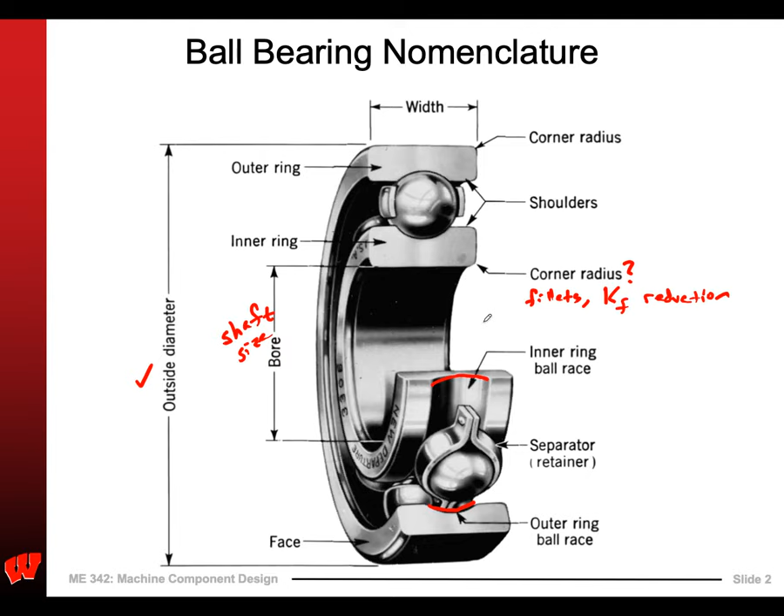So that's the basics of a basic deep groove ball bearing. As I mentioned, there's several types of ball bearings. There's the deep groove - the filling notch means it's big enough here. Typically there's only one filling notch where I offset the rings, and then I can get the ball in there. There's also the angular contact bearing, though this doesn't actually show it very well.

We'll skip that - a bunch of other ones. The shielded means there's just some sort of little clip here that prevents stuff from getting in. This is sealed, where it's shielded and has some sort of rubber seal to keep dust out. So this is good for dust, and maybe some rainwater. These are not really submergible - if we tried to submerge these, they would get wet.

Self-aligning - this is what we've talked about a lot. We say, assume it's self-aligning bearings. Because what can happen is this can tip relative to this, where it mounts on the outside, and then this whole thing can rotate in here. So this could tip this way or this way. That would not provide a resistance to moment, whereas this would. We don't want to do that because it puts undue stress on the bearing, but this can freely slip.

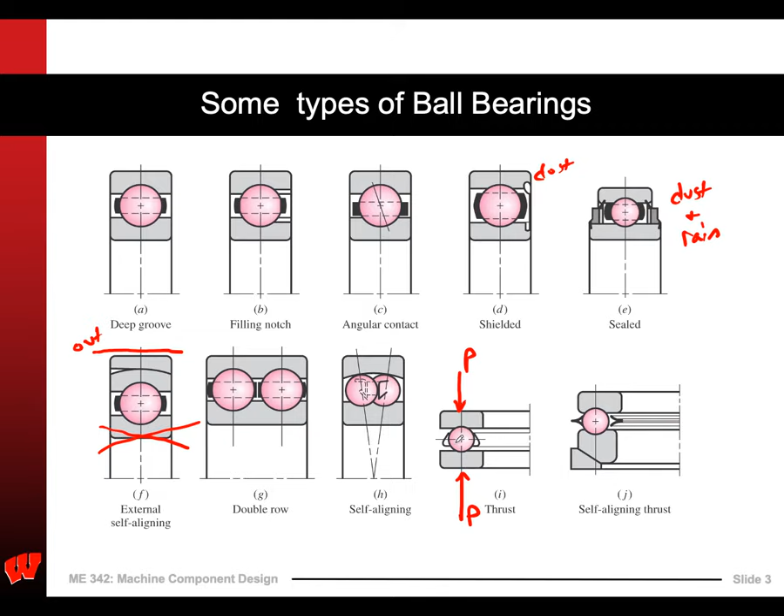Double row, self-aligning. A thrust bearing is where the load goes like this. These other ones are all made for a radial load - here's the center line, this is radial load. Here's the load that compresses the bearing that way.

Roller bearings - in a little bit I'm going to talk about some trailer bearings. In reality, most wheel bearings look like this, whether they're on a car, a trailer, or a tractor. These would be a tapered roller bearing. The reason being is that they're pretty low profile in this direction, so they're small in this direction here, and they have a very large surface area. So if you think about the contact stresses, that's pretty low.

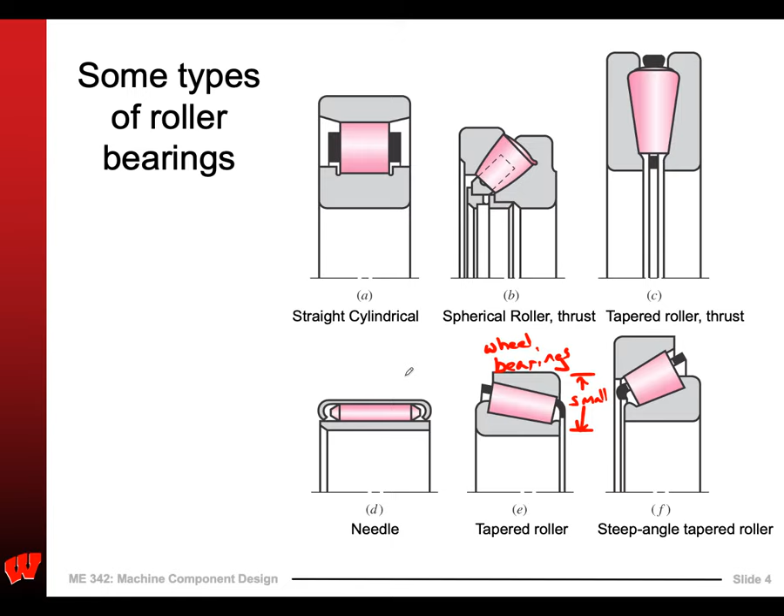Some specialty cases - needle bearing, which is really just a roller bearing but with really small, long, thin rollers, so we call them needles. For the purposes of our design project, we're going to be working strictly with ball bearings.

Now this is always a little confusing to me, but I think this is a pretty good schematic - it comes from our book. Let's say I know the size of the shaft, and the more load I need to carry, the bigger bearing I need. So the medium series would carry a very high load, the light series would carry less - this is extra light, or extra extra light. Light series is 200, medium series is a 300 series bearing.

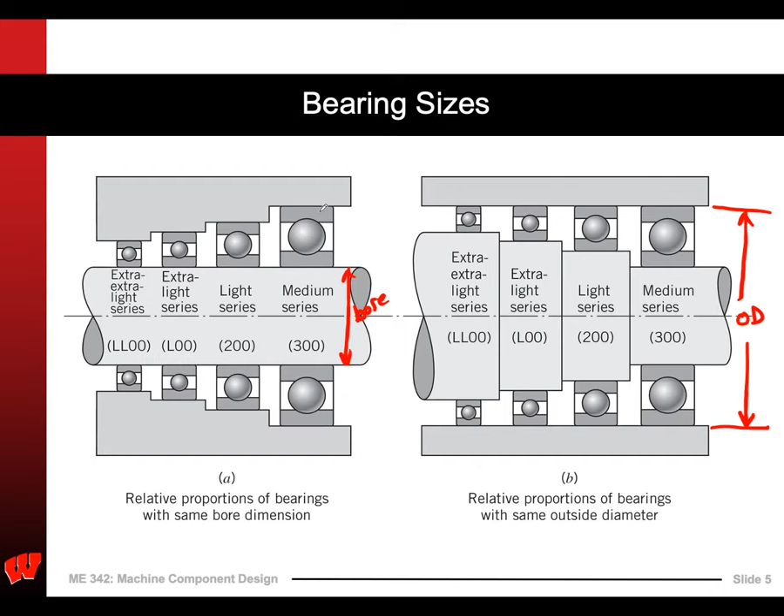So this is the outside diameter here, OD. Right, so this is just a good visual, right? Extra light bearings—basically, the smaller the balls, the smaller the load. Why is that? Because surface stresses are related to radius, or inversely related to radius. So the larger the radius is here, the less the surface stresses are, the contact stresses, the Hertzian stresses. Okay, so that's a little bit of that.

All right, keeping the dirt out of the bearings, that is important. So there's two types—I talked about this briefly already. We've got shielded bearings and then sealed bearings. This may seem like, oh, why wouldn't I use a seal every time? Because when you put the seals in here, the rubber seals tend to generate a lot of extra friction, right? So these things don't spin quite as well. They cause some extra friction.

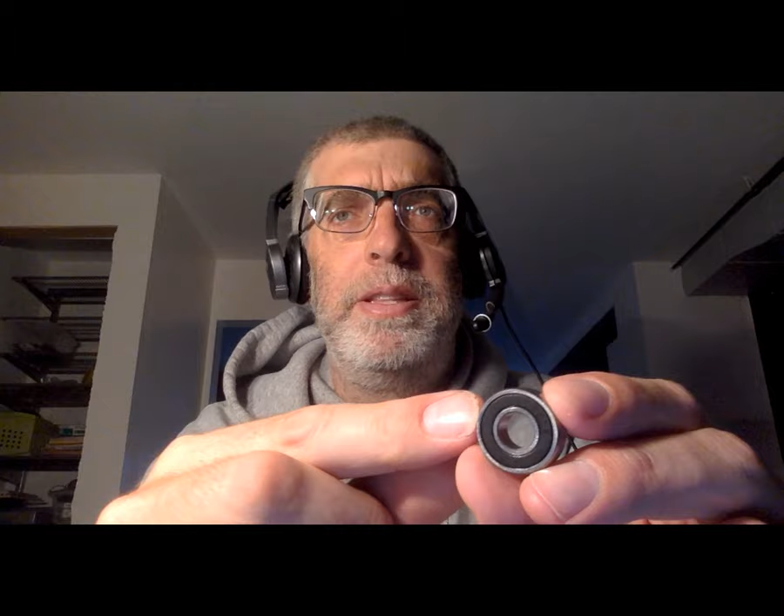All right, let's take a quick look here, see if I can get this to work. So this is the little ball bearing that I showed you the other day, right? We're going to look at this again in a little bit. You can see this has a little seal on it, right? This is basically a skateboard wheel bearing, but this has just a seal on it to keep this stuff out. Okay. So if I spin this, it doesn't really spin like a fidget spinner would spin. It doesn't keep spinning for a long time. So, one example there. All right, anyway.

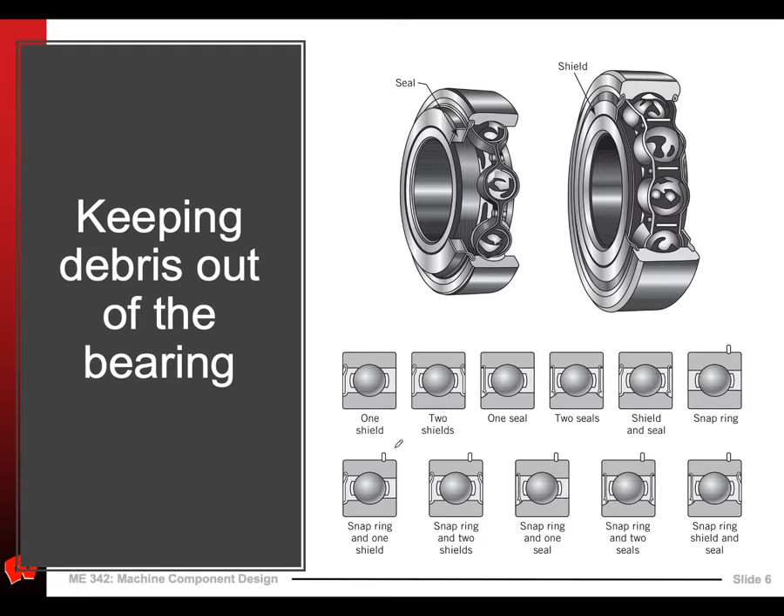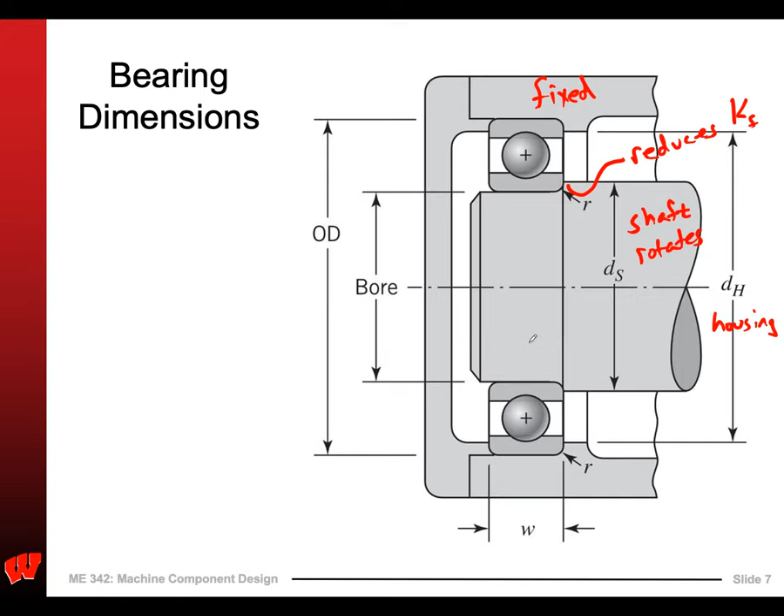This may seem redundant, but for those of you who haven't looked at bearings a lot or spent a lot of time playing with them, it's probably another nice little good schematic to see.

All right, now we have to talk about what defines the life of a bearing. All right, and so how do these things fail? Typically due to surface contact, surface fatigue, right? So it's spalling or pitting of an area greater than 0.01 inch squared, right? So that's pretty small—it's 1/10 of an inch by 1/10 of an inch. And if that happens, then things go downhill fast because there's all sorts of impacts and contacts and stuff going on.

Life is given in the number of revolutions, right, and this should seem obvious here, that we can't really say hours—or if we said hours, we'd also have to give a speed, or if we gave years or weeks or whatever, we'd have to really rate that to something else. So we typically refer to it in just the number of revolutions.

All right, the rated life—this is important. The rated life is for 10% of the samples to fail. Okay, so this is called L10, right, and that's for 10% of the samples to fail, which corresponds to 90% reliability. And then the median life, right, is the average life required for 50% of the samples to fail. Okay, so this is 50% reliability.

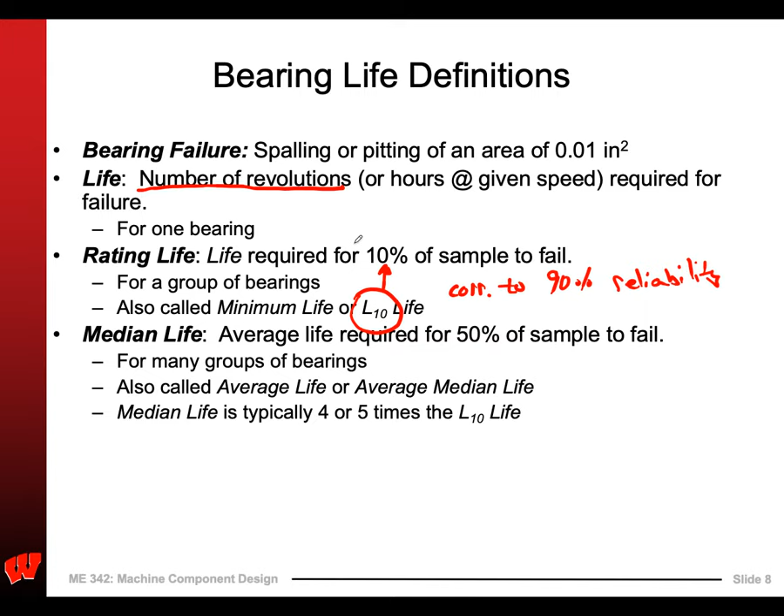And then I guess I make note of this later—the median life is typically 4 to 5 times the L10 life. Does that make sense? Yeah, sure. If only 10% of them fail, that will be before 50% of them fail, right? So I have 100 bearings running. When the 10th one fails, I say, okay, that's L10. And then when 50 of them fail, then I call that the median life. Right? So that's important to know that L10 is the 90% reliability.

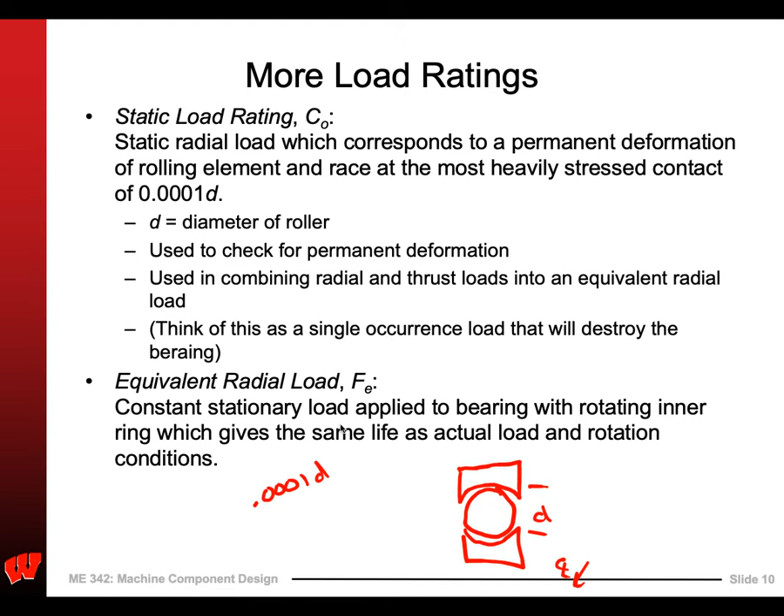And so the equivalent radial load is a combination of loadings put into one. We've seen that before with stresses.

C10, that's the load to get 10% of them to fail after a million cycles. And then C0 is the load to just deform it once—I just load this thing up once and it fails.

All right, so let's look at a typical bearing here. Now, I know it's painful—you're watching a PowerPoint video online, you're stuck in your parents' basement wherever you are. And now, not only that, but I'm going to throw some tables in. But let's take a look.

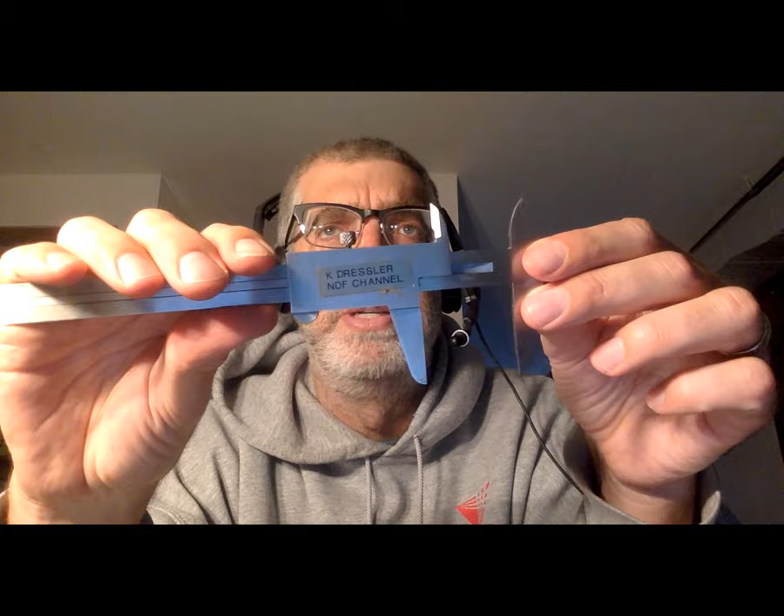So here is a 40 millimeter bore. That's pretty big—what would 40 millimeters look like? Let's open this up to 40. So this is what we're talking about, this is a 40 millimeter bore. That's a pretty big thing, right? That's like a truck axle, or maybe a 20,000 pound trailer axle or something like that.

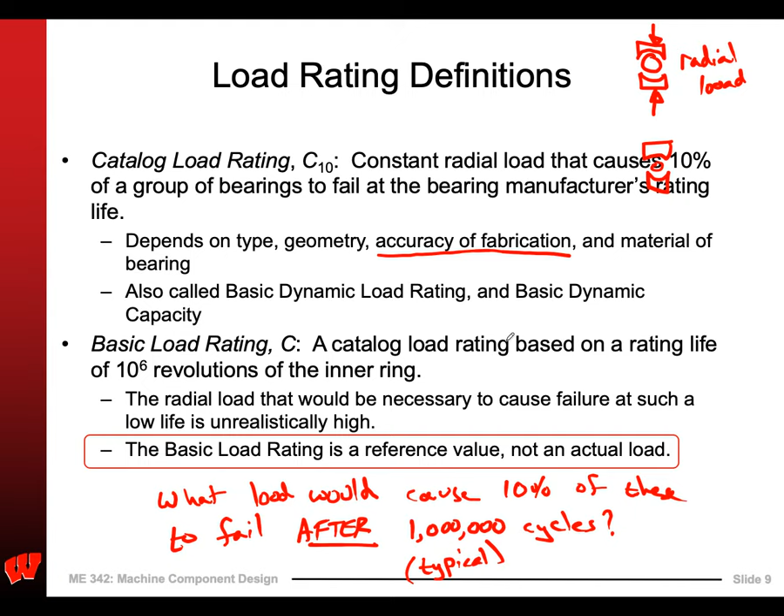Hold on. Oh yeah, the basic load rating is a reference value, not an actual load, right? So if you tried to load this thing up to C10, it would fail right away. Why is that? Because bearings are designed to last many, many more times than a million revolutions.

And so we'll see how this relationship works between the life of the bearing and the load of the bearing. Hold on, I got to turn off the furnace.

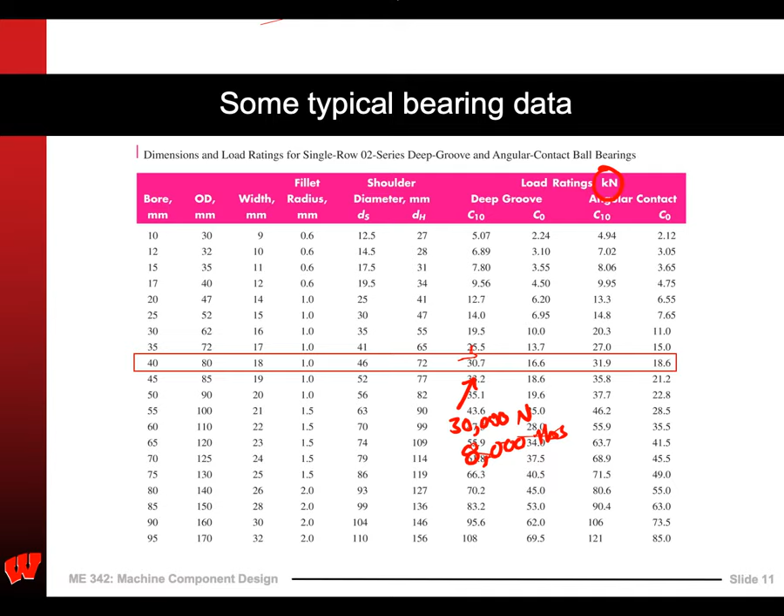Okay, so it doesn't make sense that C10 could be more than C0, but it actually kind of does, right? It's just a reference value.

So the relationship between the load F and the life L. Now, would it make sense to use L for load and L for life? Yes, except that we can't. So bear with me here that load rating is C, load is F, and life is L.

So if we were to plot these on a log-log scale, we would discover that there's a linear relationship between the load and the life. So the higher the load, the shorter the life. A lower load leads to a longer life. That makes sense, let's write it down.

Smaller load equals longer life. I don't know what's going on with my pen here, something's really going on with my pen.

All right, so now we're going to say that the relationship is exponential or logarithmic. So the load, we better label that because that gets confusing. Remember that this is the load, and this is the life.

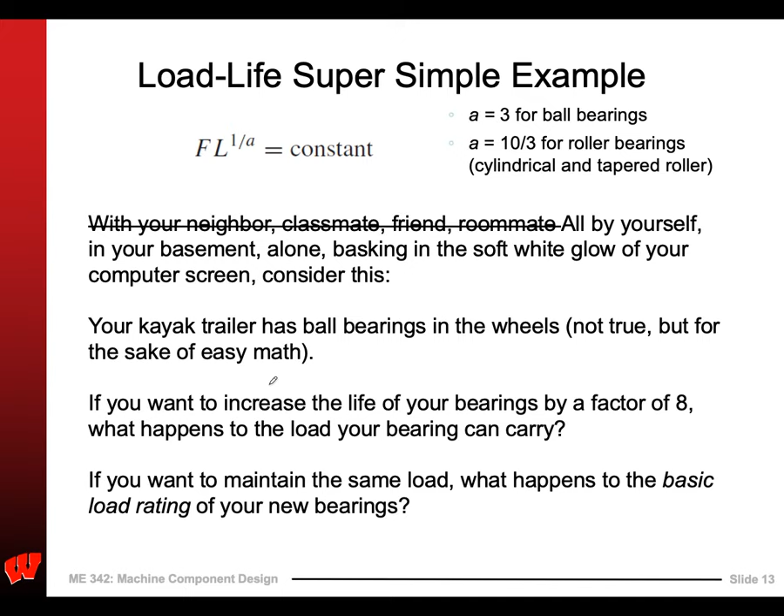If you want to increase the life of your bearings by a factor of 8, what happens to the load your bearing can carry? So I want this to last longer, which means the load has to go down.

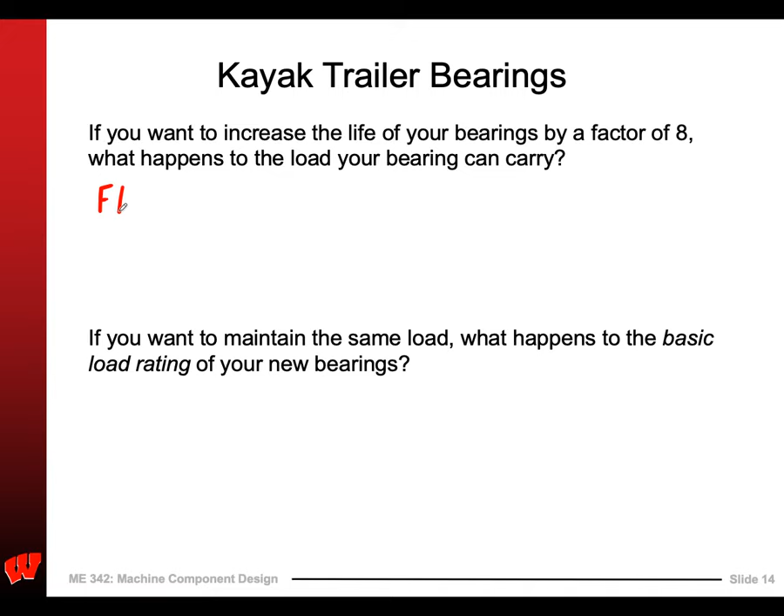Okay, so I have this kayak trailer, but I'm willing to carry a little smaller load so that my bearings last longer. Say I've got a really, really long trip. Well, I know that the force that I carry times the life to the 1/3 equals a constant.

All right, so if I'm going to keep my same bearings, then the load as it is now, times the life as it is now, has to equal the lighter load times the new life to the 1/3. Well, I know that, okay, actually I'm going to just solve this.

I'm really interested in how my new load relates to my old load. So I'm going to say that F2 over F1 equals, let's say I had to divide that, so I got to divide L1 over L2, L1 to the 1/3 over L2 to the 1/3.

So F2 over F1 equals L1 over, well I want that to be 8 times as long, to the 1/3. And so that means F2 over F1 equals, well those cancel, and that means it's 1/8 to the 1/3, which is 1/2. So if I cut my load in half, my bearings will last 8 times as long.

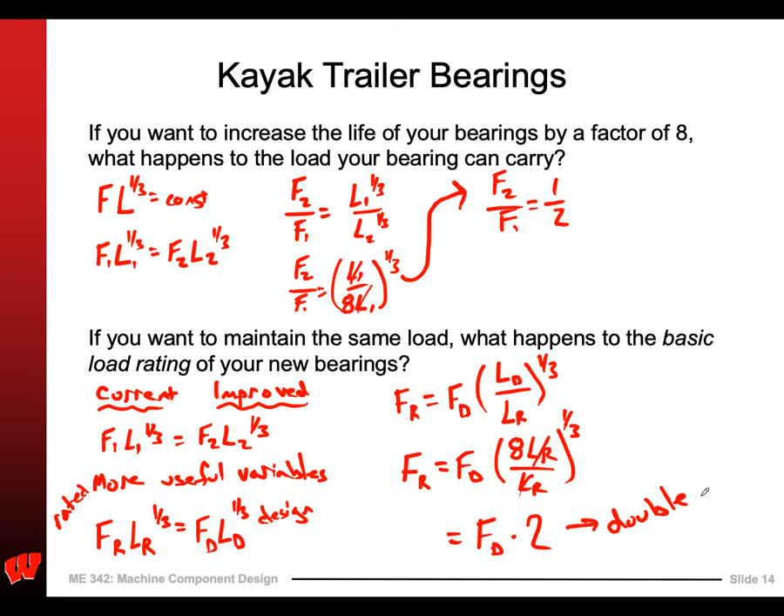But if you're like me and you get confused, then it's nice to actually work through it. I like to use 'rated' and 'design' when you're trying to pick this stuff up. All right, so this does not apply directly to your project, but I talked about it briefly before.

So if I've got some radial ball bearings, like what we're using, but I've got some thrust load and some radial load — say we've got the skateboard example, right? So I'm pushing really hard here, that's the radial load. Nope, that's the thrust load. Shoot. So this is thrust, and then this is a radial load there, right?

So if I've got those, I can combine them like this. How does that work? If the thrust load is pretty small relative to the radial load, less than a third — Ft over Fr is less than a third — then I just say the equivalent force is the same.

Now, if I increase it such that I have a pretty big thrust load compared to the radial load, it turns out this ratio actually goes down in some small ranges, because I'm spreading the load out over more rolling elements. And then finally, if I've got a really big thrust load on a radially loaded bearing, I just multiply the thrust load times 1.176.

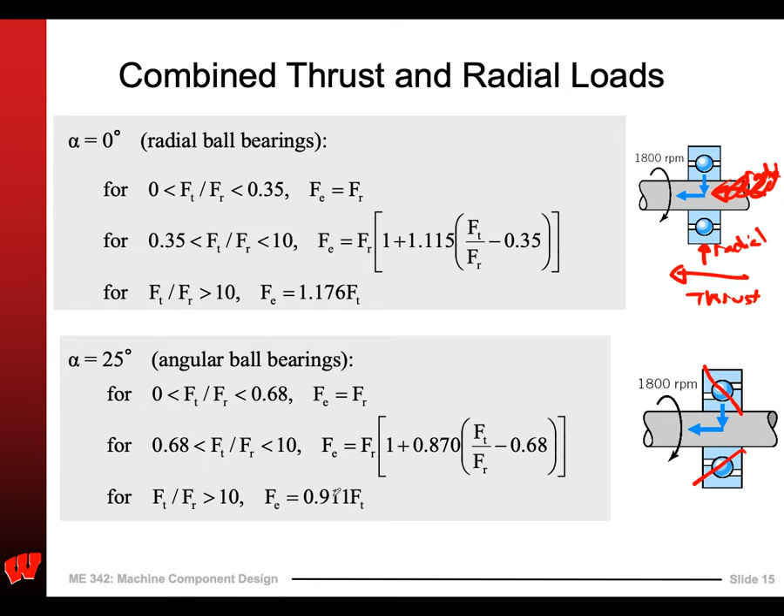And then, for angular ball bearings, you can see these are intended to be loaded at that angle there, right? So it's not quite as extreme — I'd rather have a thrust load on these.

Now, reliability-wise, remember way back when we started defining these things, we said that's also when 10% of them fail — that's the load we're talking about. So 10% failures is about right here, whereas when half of them fail, it's about here. It turns out the median bearing will last about 5 times as long. So this is basically 50% reliability.

So there was a quiz a while ago where I said, in reality, bearing life follows a Rayleigh distribution. You can't have a bearing that has negative life, that doesn't make sense, so it has to be pinned at 0, and then it goes up. It's a form of a Weibull distribution, or a special form of a log normal distribution, but it's kind of skewed to the right. There are some bearings that just by dumb luck last a really long time, and there are a few that fail early.

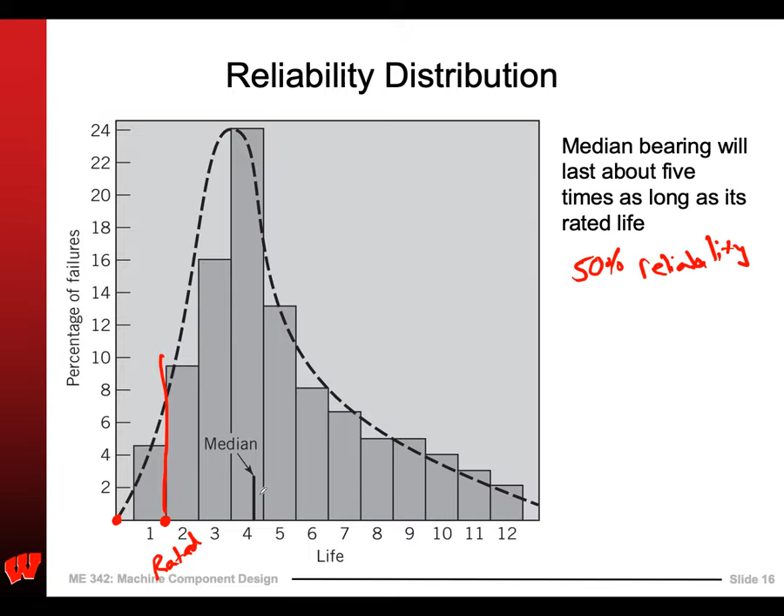But remember, we're rating this at the rated life here, and then this would be the median. It turns out they last about 5 times as long. So with that in mind...

We can adjust it here. We can say the life will be... what do we have going on here? This is the rated life, this is the basic load rating, and this is the design load. That's very similar to what we just did. Why is it 10/3 here? This should be 3 actually, so let's cross that out and make that 3.

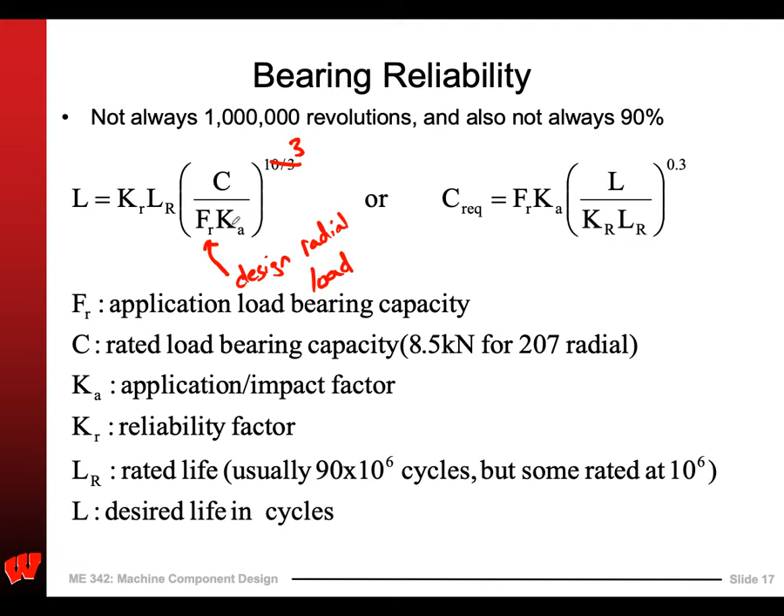So FR is the application, that's the design load, design radial load. And this is the rated capacity.

And then what is this? This is an application factor here. So the bigger this is, a big Ka reduces the life. A big Ka reduces the life.

Reduces life. And then Kr is a reliability factor. So if we want this to be more than 90% reliable, we have to have some Kr adjusted there. So a small Kr means shorter life.

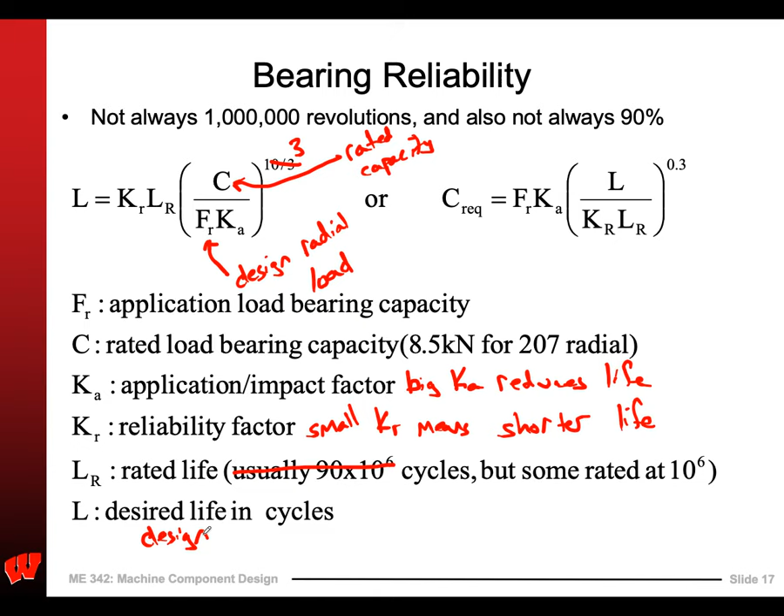And then LR is the rated life, usually 90 times 10 to the 6th. No, I've seen them actually at 10 to the 6th, so let's get rid of this here. I don't know how that snuck into my notes. And then this is the design life.

So what do those factors actually look like? The application factor - if I'm dealing with pumps, electric motors, stuff that's really smooth, it's just 1.0. If I've got some gearing, as these gears are engaged, we have somewhere between 1.0 and 1.3. Light impact would be something like an internal combustion engine, a Harley-Davidson engine maybe, somewhere in here. Let's say this is... that's like a Harley-Davidson motorcycle. But notice these all increase the application factor.

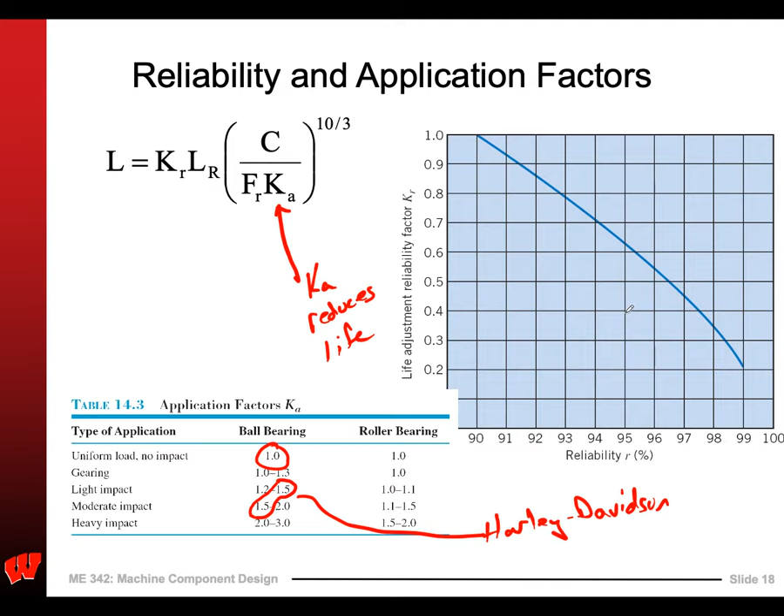So Ka reduces the life. And then what about the reliability factor? If I want to be more and more reliable, I use a smaller and smaller reliability factor. So from table...

Go back here. And then this is... what is going on, this is one of my worst recorded lectures of all time, I think. And then this here is from the plot.

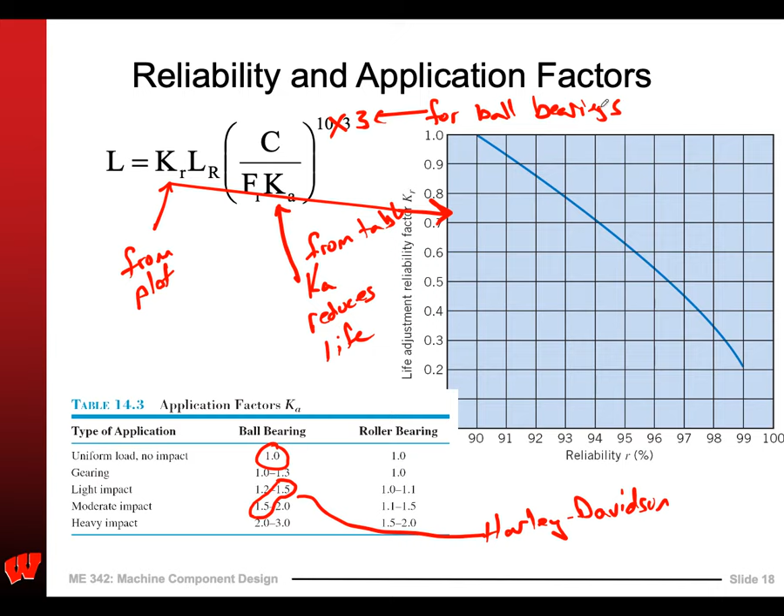Okay, we'll put that like that. So then, it's really just plug and chug to get the rated life. Let's leave this, that's for a roller bearing, that's for a ball bearing there. Make a note, for ball bearings.

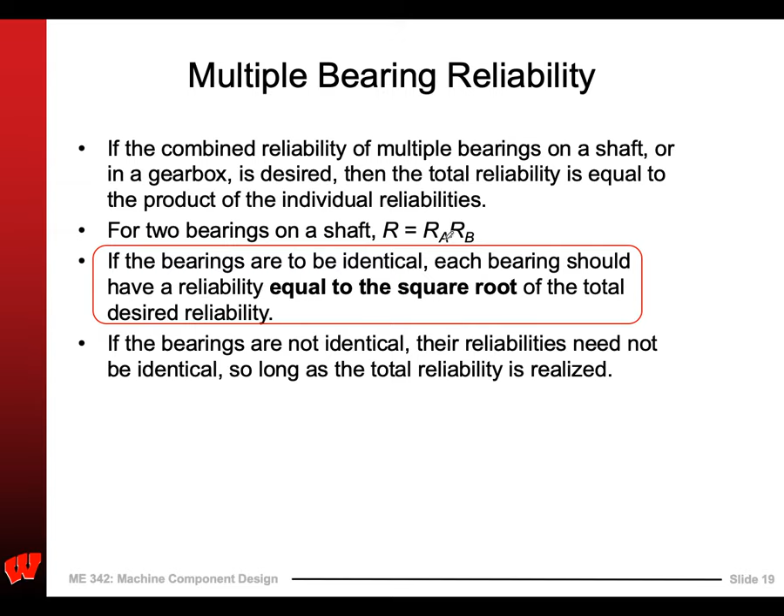Now, one more very important note: multiple bearing reliability. This means that if I have two bearings, and they're each only 90% reliable, the total is only 81% reliable. So if I'm trying to get up to 90, 95, 99% reliability, I need really high reliabilities on each one, because if one bearing fails, the whole thing fails. So that's very important to note: if the bearings are to be identical, each bearing should have reliability equal to the square root of the total desired reliability. Why is it the square root? Because of this - the reliabilities have to be higher since square roots get bigger.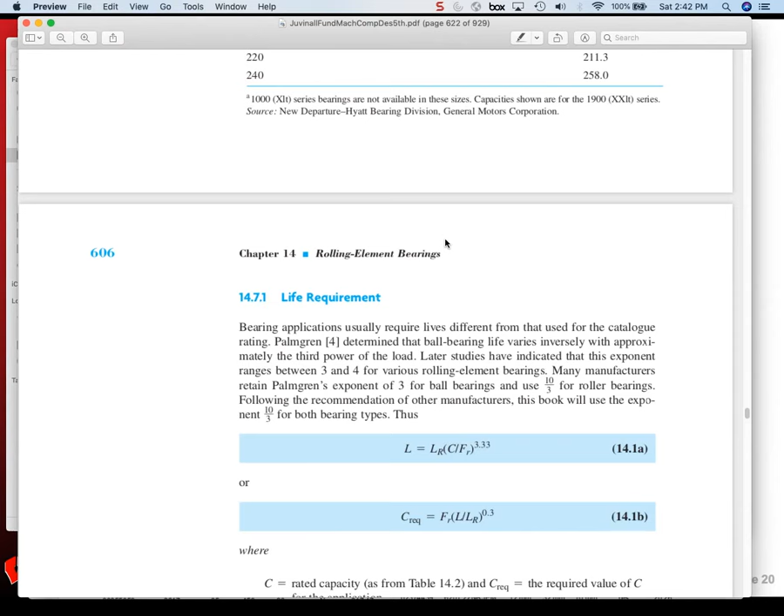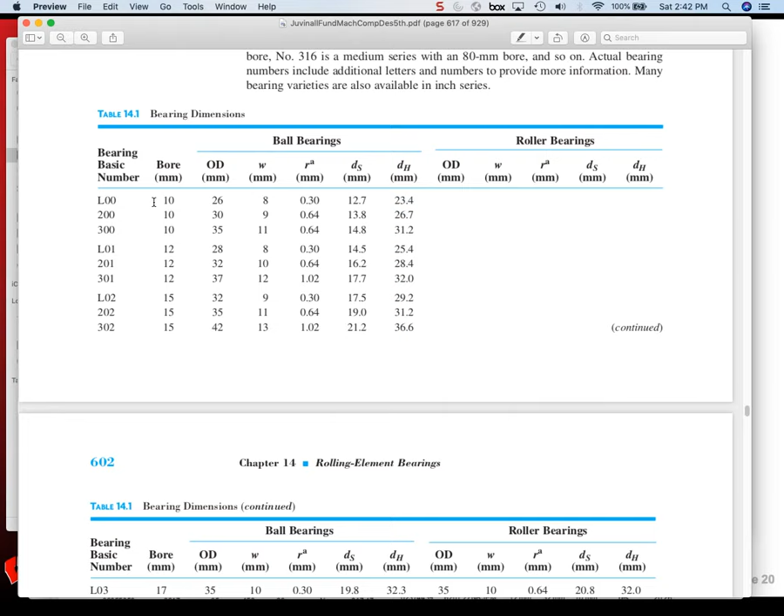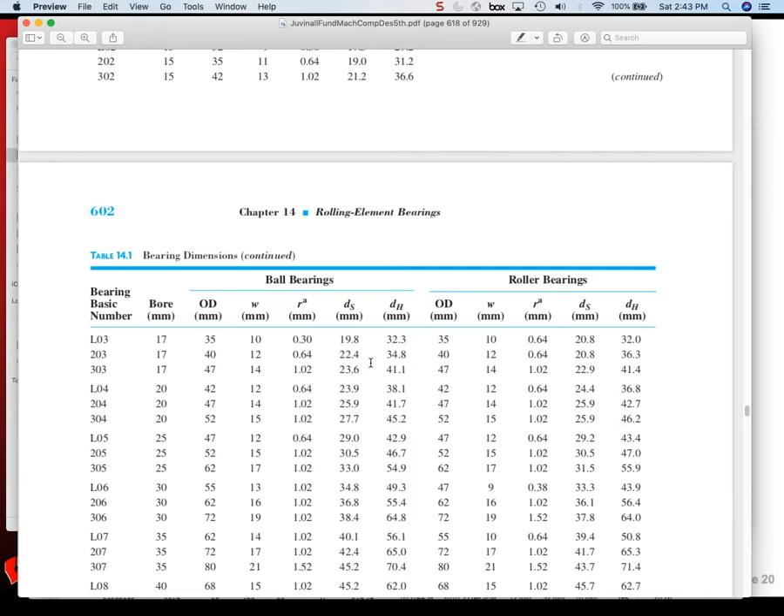Okay, so bearings for your project - the standard bearing dimensions are in table 14.1, and I've got that here. This gives you pretty typical bearing stuff. Here's a really light bearing, it's 10 millimeters in diameter. You guys can probably be on the order of 17 to 30 millimeters in diameter. And it gives you the OD for the different series - obviously, the heavier series I go, the bigger the outside diameter gets, so it takes more room to mount this thing. And then it gives you all the other dimensions, the radii and the other dimensions there.

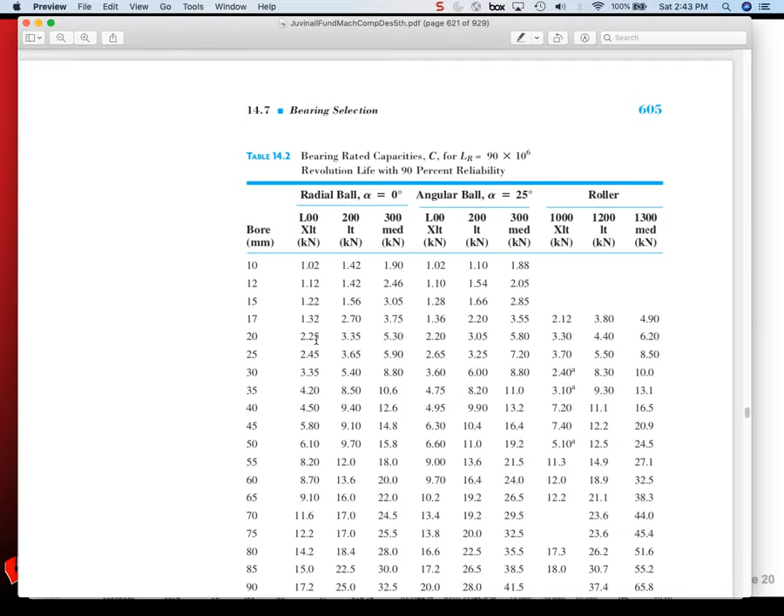And then we go down to table 14.2. This gives you the load rating - oh, this is 90 times 10 to the 6th, okay, this is for 90 times 10 to the 6th. I was wrong before, read the fine print. And at 90% reliability. So then you can actually find the loads for a given bore, what series it is, and the loads go up and up and up. Okay, so I think that might be it. Yep, that's it.